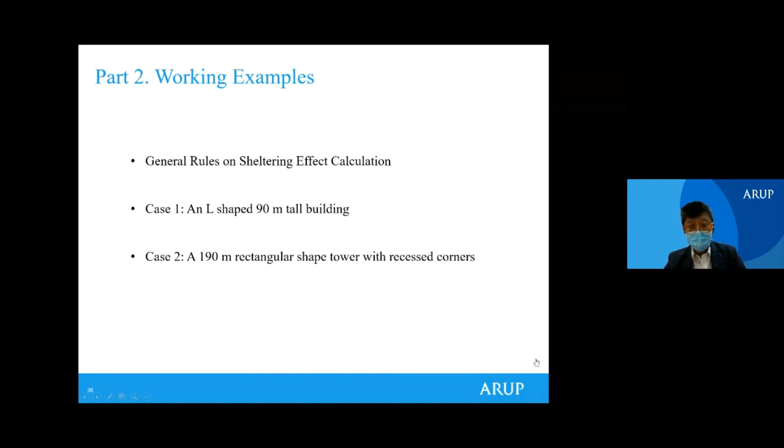Following what is described by Alexis, I'm going to show some working examples to introduce the detailed calculation procedure. Within this part, there will be 3 contents. The first one is a general briefing about the sheltering effect calculation, and the second one is an actual working example.

This working example is a 90 meter tall L-shaped building. The second work case will be a taller building, about 190 meters, and it's a rectangular shape, also with some corner modification. So we go through the 3 contents one by one.

The first one is a general rule on sheltering effect calculation. As Alexis has introduced, this is a new feature in the 2019 code. Within that, if we consider the sheltering effect, we can get some benefit. So we want to touch into more details because this is quite new - it hasn't appeared in the previous code.

So the sheltering effect is, for example, as explained in the first part, if the elevation is 150 meters, we assess the wind pressure. That is for example in the 2004 wind code. But now, if due to the sheltering effect - physically it's something like the wind profile is lifted upward - so for example if we say the displacement height is 50 meters, then previously we assessed the wind pressure at 150. Now, still for the 150 meters tall building, we only need to calculate the wind pressure at 100 meters.

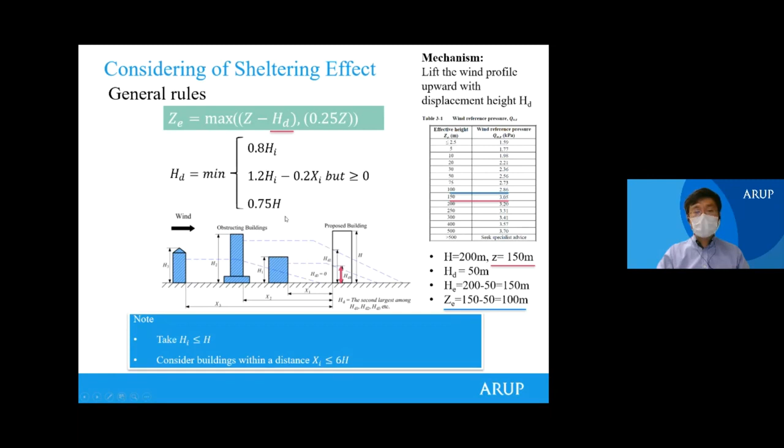So next are some general rules. Rule number one is that if we have only one obstructing building, we shouldn't take the benefit from the sheltering effect. The reason is the sheltering effect is something that we rely on other buildings to provide, to reduce the wind pressure. So we need to avoid the condition that within the design life of our target building, this obstructing building may be removed. That's why if we have only one obstructing building, we shouldn't take any benefit.

Rule number two is if we have more than one obstructing building, what we need to do is evaluate the exact sheltering benefit from each individual building. How do we do the evaluation? We need to follow the three formulas. But to make the code more user-friendly, we also provide a contour plot. This is in A2.3 in Appendix A2. This is exactly the same as the three formulas.

So based on this, we can identify the actual sheltering effect for each individual building. For example, the taller one - if we assume it provides the bigger sheltering, we shouldn't take that into account, we ignore that. And then we keep searching for the second most benefit, which will be a slightly shorter building but closer to the site, and then we can take this into account. The reason we can take this into account is that for two individual developments, the chance of simultaneous redevelopment and simultaneous removal of two buildings together - the probability is much smaller.

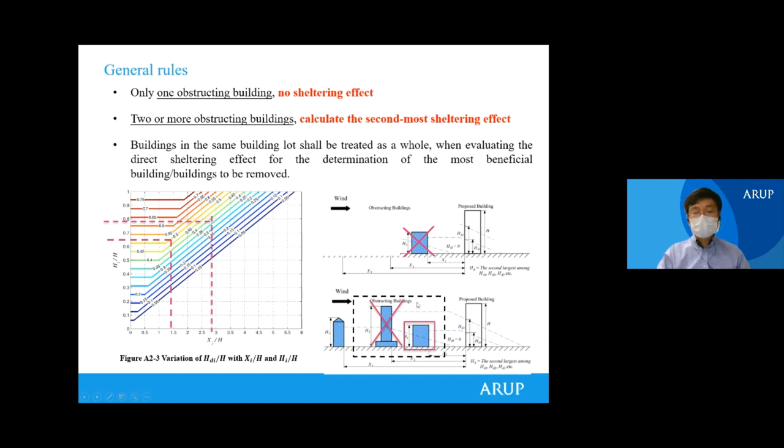Another case is, we talked about the condition in the flat ground or flat terrain. But in Hong Kong we have many locations in slope terrain, so how should we treat it. First of all, we should keep a clear idea that the topographic calculation and the topographic effect, and the sheltering effect, should be calculated separately. Then the topographic effect can be calculated independently.

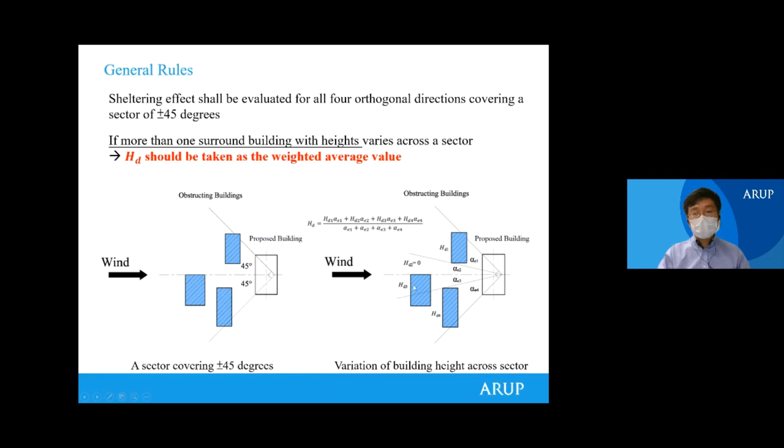All the previous discussion considers a one-dimensional problem, but in the actual site condition it's two-dimensional, it's a plane. So the code says for the sheltering effect, we need to evaluate 4 orthogonal directions, each covering about plus and minus 45 degrees, so that is a 90-degree sector. If the building height varies across this 90-degree sector, we should calculate the sheltering effect for each individual building and then do a weighted average.

According to our experience, the code also allows the user to do an equal division. For example, within the 90 degrees, we can equally divide the sector into smaller subdivisions, but the total number of subdivisions shouldn't be fewer than 4. According to our experience, if we divide this into more divisions, it will lead to a relatively easier calculation. The reason is, if we divide into small divisions, it's more easy for a building to occupy the whole sector, which will simplify the calculation because we don't need to do the weighted average.

So that's a brief introduction about the sheltering calculation principle. Now we go to the actual working example.

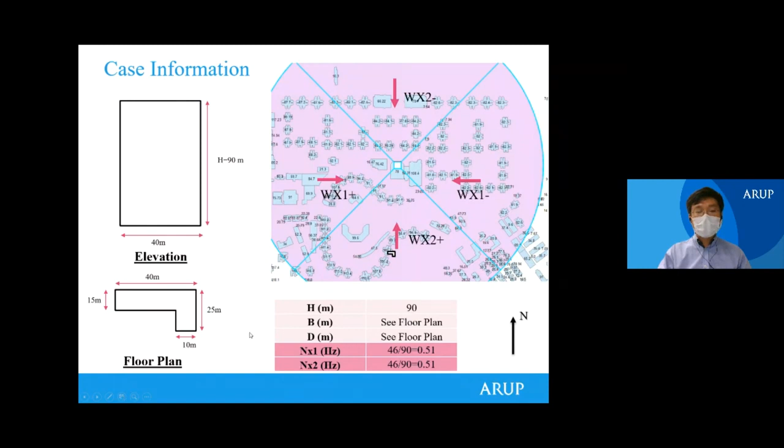The first working example is an L-shaped building. This is the map where it is located - it's in a relatively very dense urban center, and it's not very tall, the total building height is 90 meters. On plan it is an L-shaped building, the breadth is about 40 meters, and the depth on the two sides is about 15 and 25 meters. Because the building is shorter than 100 meters, the natural frequency we can use is 46/H - that is allowed by the code.

So what we want to demonstrate through this working example is, first of all, the general workflow to conduct a codified calculation. The general workflow will be, at the very beginning, as Alexis introduced, we make an initial assessment whether the standard approach applies or not. If it applies, we move forward to do the along wind calculation.

In the along wind calculation, first we need the reference design wind pressure related to directionality, sheltering effect, and the topographic factor. Then force coefficient, size, and dynamic factor. Then we can calculate the along wind force. Based on the along wind force and the geometry, the B/D ratio, we can calculate the torsional load.

Then we also need to check whether the building is crosswind significant. If not significant, what we should do, and if it is significant, what we should do. And finally, the load combination. Some bright points with this particular working example: first of all, the crosswind is not significant here, so later we will show another example where the crosswind is actually significant.

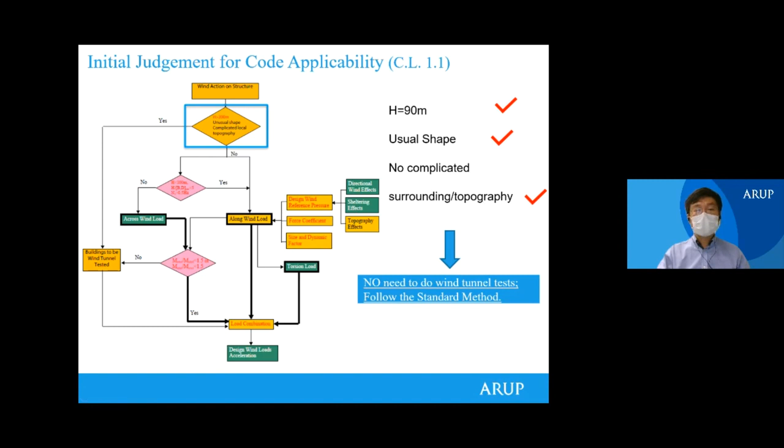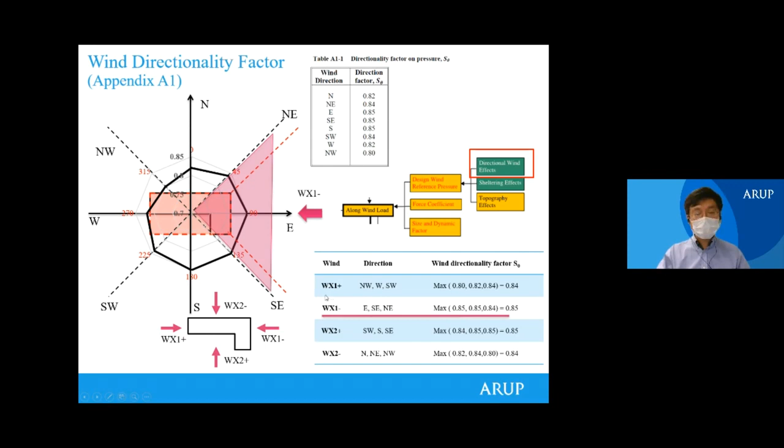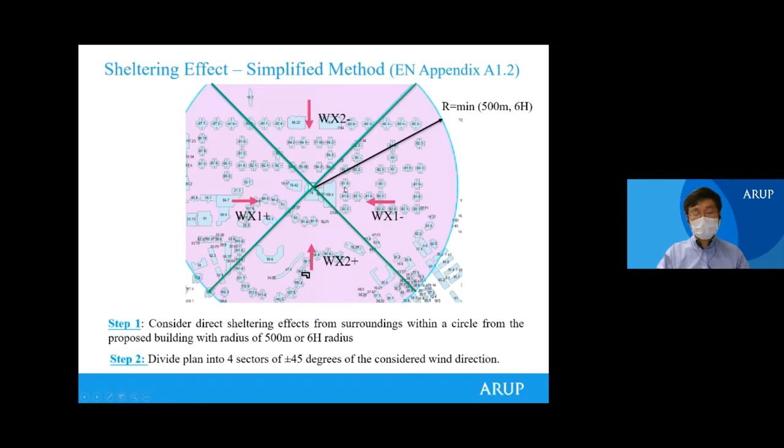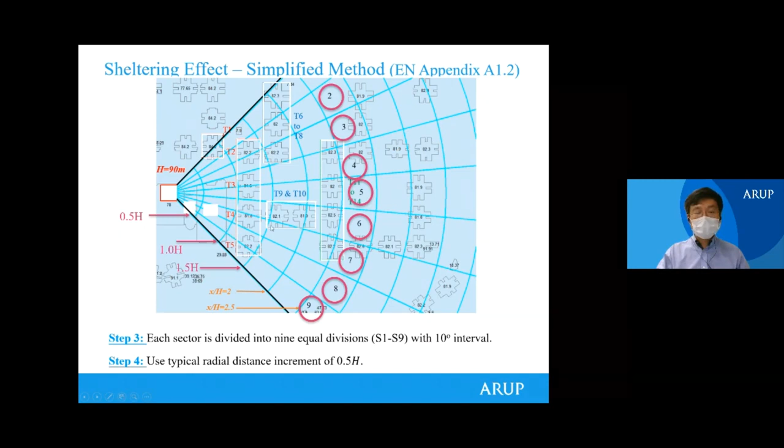And then we introduce some general principles on how we can use the simplified approach to make our calculation easier. So the first one we need to bear in mind is within 2 times of the target building height.

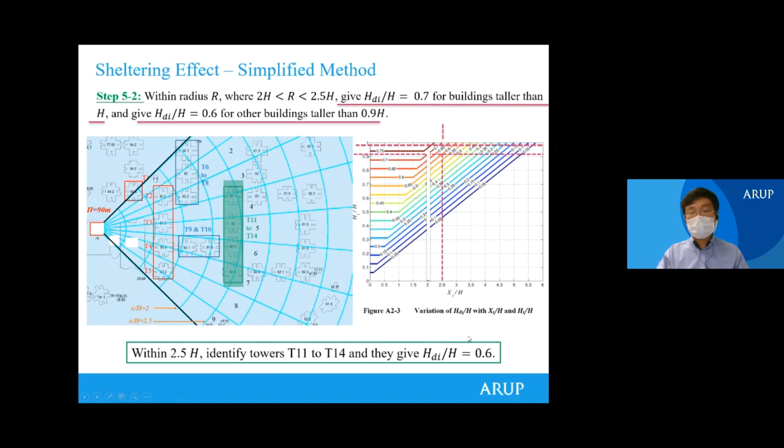So those are the buildings highlighted in green. For those green shaded buildings, we can also get a relatively big sheltering effect, that is 0.6. So then we need to go to the detailed calculation.

So according to the rule, we need to identify the first and second benefit. Actually within 2 times of the building, all those buildings can provide the full sheltering. So what we need to do is just pick up the first layer as the most sheltering building, that is from tower 1 to tower 5. Then we remove them, we ignore their contribution.

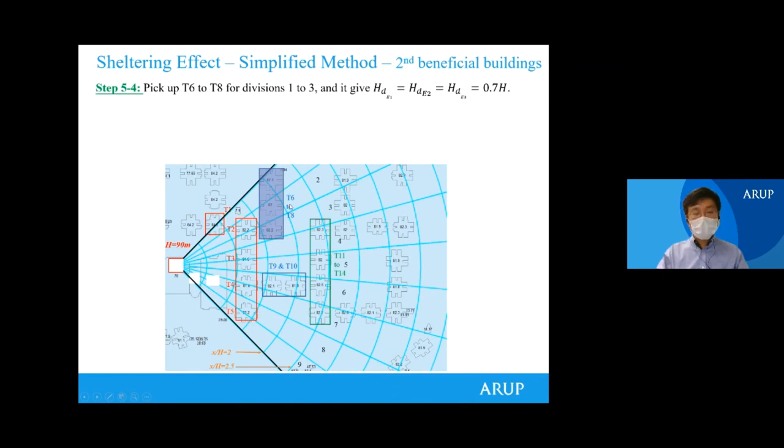So further to that, we pick up tower 6 to tower 8 to provide the sheltering for division 1 to 3. They provide the full sheltering, that is 0.7. And then for division number 6, we pick up tower 9 and tower 10. They also give the full sheltering.

Further to that, for division 4, 5, and 7, we pick up tower 11 to 14. So that gave sheltering about 0.6. And then for the remaining ones, division number 8 and 9, conservatively, we ignore their benefit, so that's 0. Then finally, we have known the sheltering benefit for all the divisions.

And then we repeat the same procedure. We can calculate the sheltering effect for all 4 directions. So then the sheltering effect calculation is completed.

So after the calculation of the sheltering effect, we can calculate, together with the directionality, the reference wind pressure. So here we also want to highlight that we have calculated the displacement height. The ratio is 0.51, and the total building height is 90, so the HD is 45.9.

So then, for the EZ which are bigger than 61 meters, for those values we can use the equivalent effective height directly, ZE equal to EZ minus HD. So those will be those values. However, we also need to bear in mind, if below this value, if we further still use EZ minus HD, that will give smaller or even negative numbers.

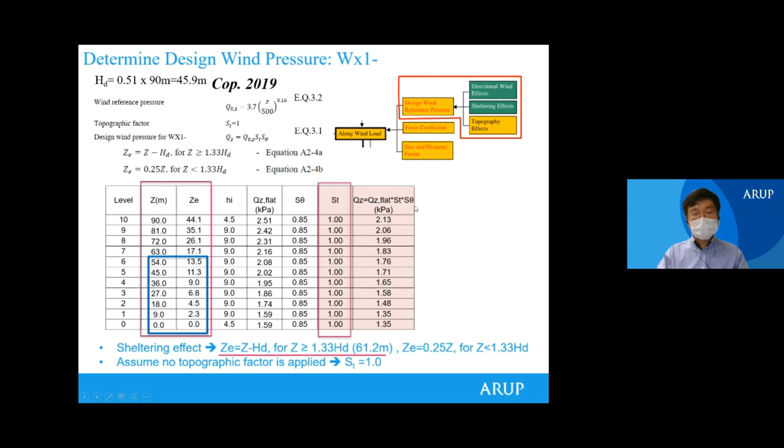So then within the code, in appendix A2, there are equations A2-4a and A2-4b. A2-4b says if Z is smaller than 1.33 times the displacement height, we need to use 0.25 Z, that is highlighted in the blue box. And then, because it is located in flat terrain, the topographic factor is 1. So totally with the QZ flat, directionality, and topographic factor all multiplied together, we can calculate the reference wind pressure.

Next, within the calculation of along wind force, we calculate the reference wind pressure. So we need to go to the force coefficient calculation. For the force coefficient calculation, I think I want to highlight another thing.

For our building, the B is 25 and D is 25. D is because we have an L shape, according to our code, figure 4.4E. For an L-shape building, the effective building depth is the average between D1 and D2, calculated as 25. So HE over D is about 1.76. Our building is 90, so if we used the original 90, it would be 3 to 4, but now it's only 1.76.

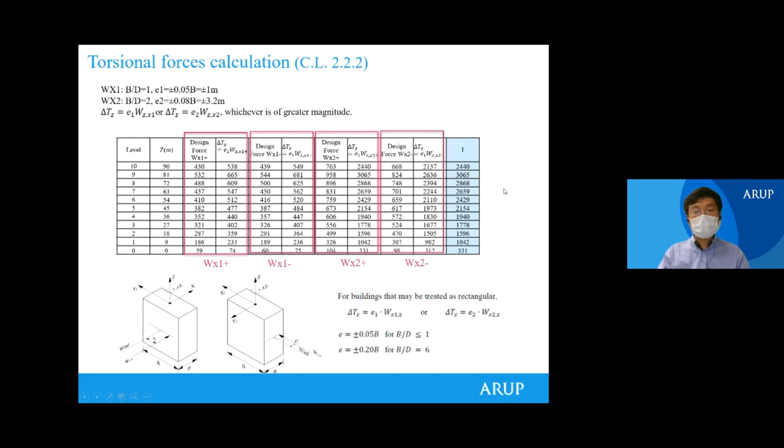Then we go to the last step of loading calculation, the load combination. Because the crosswind significance checking shows crosswind will not be significant, what we need to do is use the lateral force from both orthogonal directions, from the along-wind force, together with the torsional force to do a load combination. The load combination factor is provided in table 2.1 in the COP, so we just follow that factor.

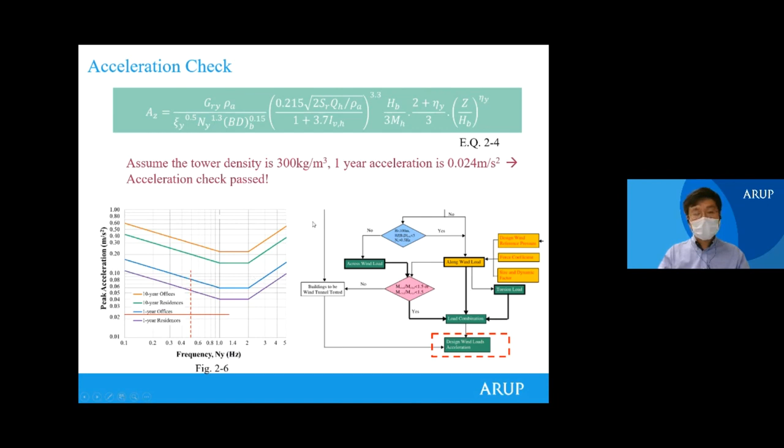So that's all for the structure wind load calculation.

The next is for cladding. This is relatively straightforward. First we need to follow equation 2.3a, that's reference wind pressure, pressure coefficient, and size factor. For reference wind pressure, we still need to follow directionality and sheltering effects, which have already been calculated, so we won't repeat. One thing to bear in mind, as Alexis introduced in part 1, a new feature for the new code is the reference height for the entire elevation is the top of the building. So we have only one reference wind pressure, that is 2.13 kilopascal.

Then we need to refer to figure 4.6a, which gives the zone key definition: where is the edge, where is the general zone, where is the corner. By looking at table B1.1, we know the net pressure coefficient for different zone keys, and following appendix C1 for the size factor formula. For edge zone, we calculate the size factor as 1.22. I also need to remind that size factor is tributary area dependent, so we assume the glass panel is 1 meter by 1 meter. For edge zone the size factor is 1.22, and for general zone it is 1.96.

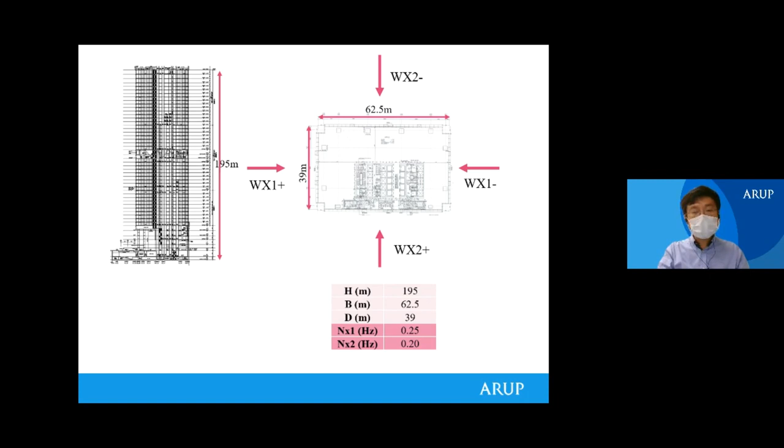The objective of this case study is to cover several unique features. The first is that we have recessed corners, and we want to use this example to demonstrate how the force coefficient can be calculated when considering the recessed corner with corner modification. The second is that because the tower is very tall, it's expected to be crosswind significant, so we'll show how to calculate the crosswind load.

Further, if a crosswind base moment is bigger than along wind, how should scaling up be conducted? And the last point is, although we pass the initial check that our building can be used for a codified approach, does that deem to be codified applicable? Is there a chance that at a later stage we suddenly realize we still need to do a wind tunnel test? We want to use this example to demonstrate we also need to conduct a further check regarding the need for wind tunnel testing.

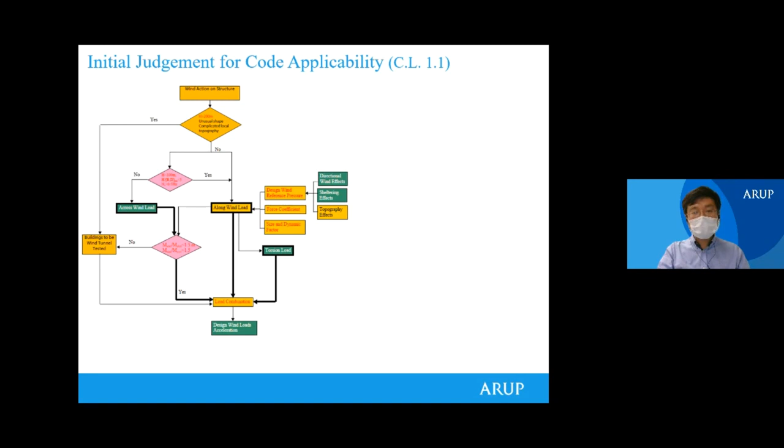Again, the first step is initial judgment for standard approach applicability. Same procedure, we won't get into details. Everything is fine, so the conclusion is the initial check shows we can use the standard approach to do the calculation.

Then determination of the design wind pressure, the procedure is also the same. First we align our building, then identify the directionality for 8 key directions, then radar plot. Then for each 90 degrees, we pick up the biggest value from the radar plot.

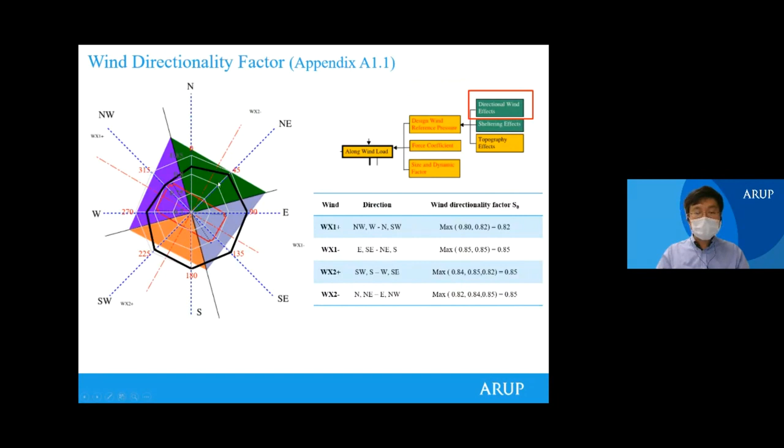The next step is calculation of the reference wind pressure. We have some assumptions here. First, we assume the building is in a very open exposure, so then there's no sheltering effect. In the last example, the ZE was significantly smaller than Z, but here we consider no sheltering effect, so ZE is equal to Z.

Second, we consider it is on flat terrain, so topography factor is equal to 1. Then very straightforward, by using the QZ flat, directionality, and the topographic factor, we can calculate the reference wind pressure.

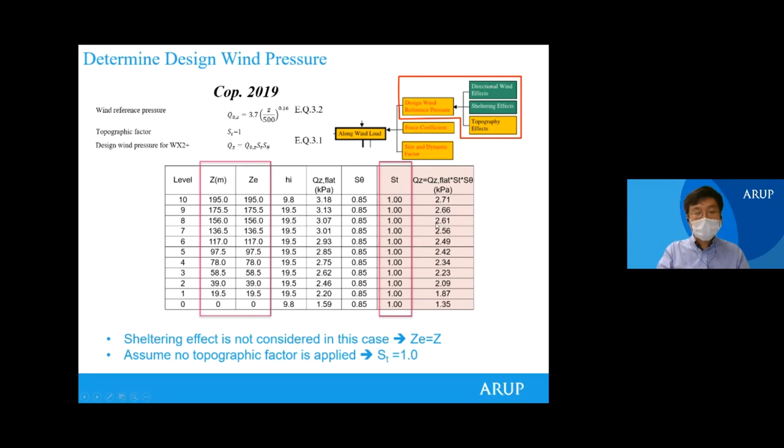As said, we want to use this case to demonstrate the corner modification. We want to remind the user that for this case, we have a recessed corner. The recessed corner dimension is about 3 meters. So we need to refer to equation 4.2 within our code, the COP. The COP here, the W is the recessed corner dimension. So by bringing in the 3 meters and bringing in the total building breadth, we can calculate the factor is 0.97, so we can have a 3% reduction on the force coefficient.

Then the final force coefficient is the product between the two, so that is 1.33. That's the final force coefficient we are going to use.

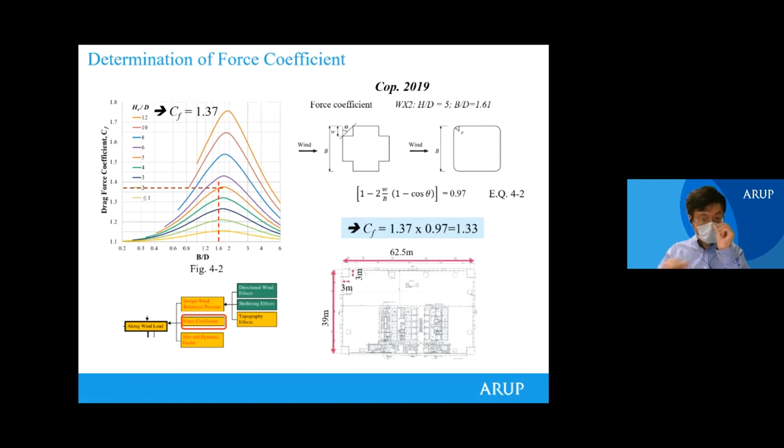After the force coefficient calculation, we need to calculate the size and dynamic factor. The first step is we need to list out all the needed parameters: the geometry information, natural frequency, and the damping ratio. Very important, as introduced in the first part, the damping ratio in the 2004 wind code is constant, so normally it's recommended as 2% for RC and 1.5% for steel.

For our case, actually in 2019, it depends on the slenderness ratio. So later we can see that for 2 different directions, we use table C2-1 to calculate the damping ratio.

Then the other formula will be the same as introduced in the first working example. We calculate the size factor by using building breadth, and then we calculate the size and dynamic factor at the top of the building. Then by using this formula, we calculate the distributed size and dynamic factor along the building elevation.

We can see the trend is that at the top of the building, the size and dynamic factor is the biggest, and at the bottom it gradually reduces, being the smallest at the bottom.

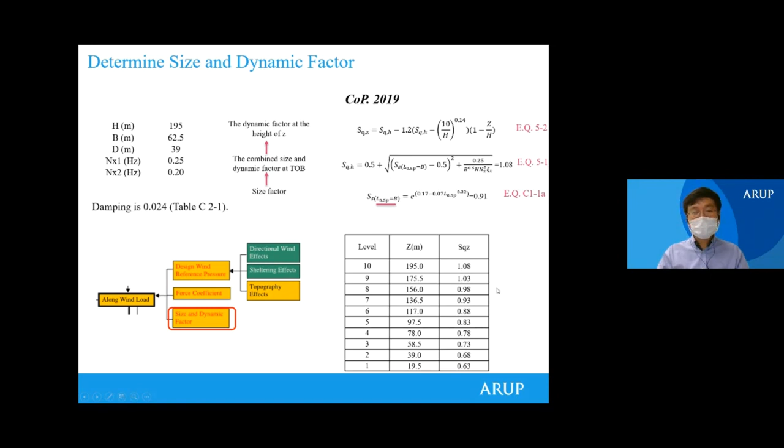And then we calculate the distributed wind force at different levels, and we can calculate the along wind overturning moment at the bottom. So for this direction, minus WX2, that will be 3,569 meganewton.

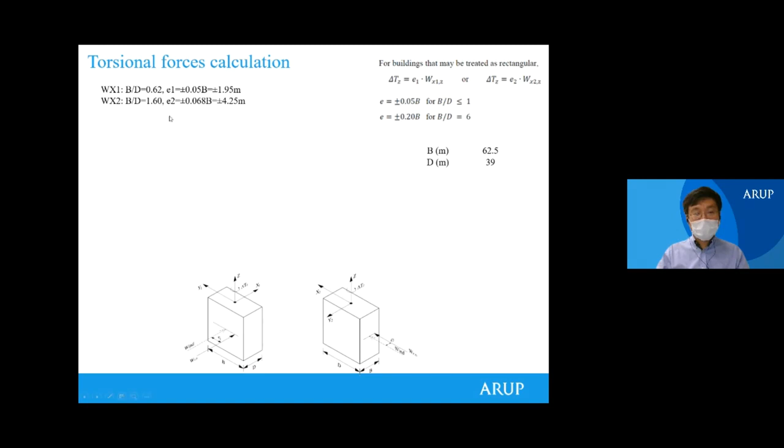The next is the torsional force calculation. The torsional force calculation will be the same as what we introduced in the previous working example. So we know the B over D ratio, we identify the eccentricity in the 2 directions, and then we calculate the torsional force in the 2 orthogonal directions. The final torsional load will be picked up as the biggest one between the two.

Next is the crosswind calculation. This is the key point, the reason why we want to introduce this working example.

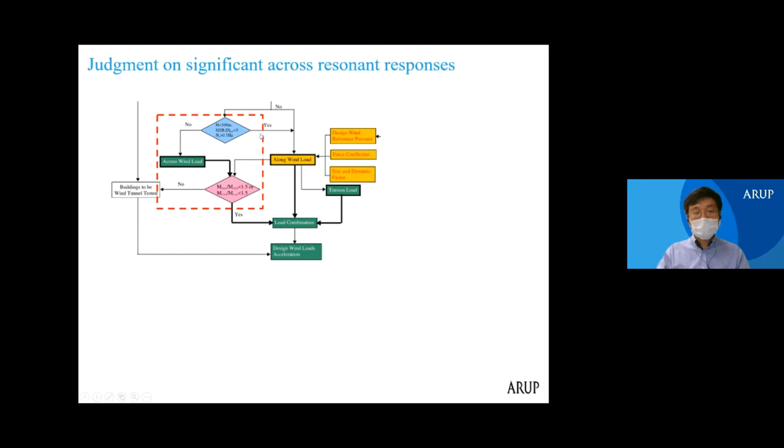Still, within this diamond box, we need to make a judgment whether the crosswind is significant or not. So list all the criteria. The first one is whether the building is taller than 100. Our building is 195, so very obviously we cannot fulfill this requirement. That means the crosswind response can be significant in this case, so we cannot get rid of the crosswind base moment calculation.

What we need to do next is use the code-provided crosswind base moment formula, within equation 2.2. Because crosswind is a purely dynamic effect, it relates to several parameters, including building geometry, the reference wind pressure on top of the building, turbulence intensity and peak factor, and the mean velocity at the top of the building. As it's a purely resonant effect, it's highly sensitive to the natural frequency and the damping ratio. Bring in all those parameters into equation 2.2.

Using the natural frequency, we can calculate the peak factor, that is 3.5. One thing to highlight: here the natural frequency is the vibration direction, or the loading direction, not the approaching wind direction - it's the actual loading direction. That's why we call it NY. So if we talk about the load as crosswind, the natural frequency should also be in the crosswind direction, that's NY, to calculate the peak factor.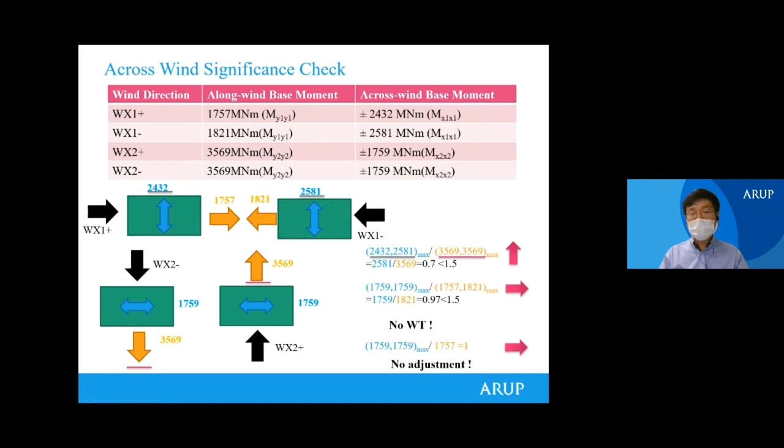For this scenario, we say we don't need to do any further action because the along wind base moment is equal to or bigger than the crosswind base moment. So we can use the along wind in the two orthogonal directions to do the load count directly. So that's the first scenario.

For the second scenario, we change the parameter a little bit. Originally for the x1 direction, we assumed the natural frequency was 0.25 Hertz. This time we reduce the natural frequency in the x1 direction to 0.21, then recalculate all the along wind and crosswind.

Especially the crosswind, it is very sensitive in this direction to the natural frequency. As highlighted in red, because we reduce the natural frequency, it is increased from the previous 1759 into 2175. So that is increased.

So let's do the comparison again. For the vertical direction, there is no change because we don't make any further adjustment. For the horizontal direction, because we have increased the crosswind base moment, this time the crosswind is bigger than the along wind. The ratio is 1.16, but still it is smaller than 1.5, so that means it's okay, we don't need to do the wind tunnel test.

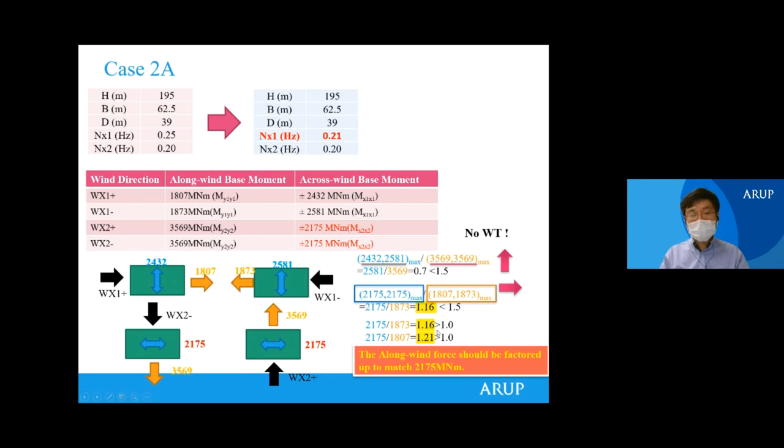The third scenario is we further reduce the natural frequency in the x1 direction, reducing it to 0.15. In this case, the crosswind base moment is increased substantially, to 3272. So again, let's check for the horizontal direction.

Now, if we pick up the biggest value between the crosswind and along wind, the ratio becomes 1.6, exceeding 1.5. So according to the code, if the crosswind base moment is larger by more than 50% than the along wind base moment, the codified approach doesn't apply anymore, and a wind tunnel test approach becomes compulsory. So we need to do the wind tunnel test. This means, through this working example, even if we pass the initial checking, it doesn't imply there's 100% no chance of needing a wind tunnel test.

Still, at a later stage, after we have calculated both the along wind base moment and the crosswind base moment, we need to do a further checking. This is also a very key characteristic we want to demonstrate through this working example.

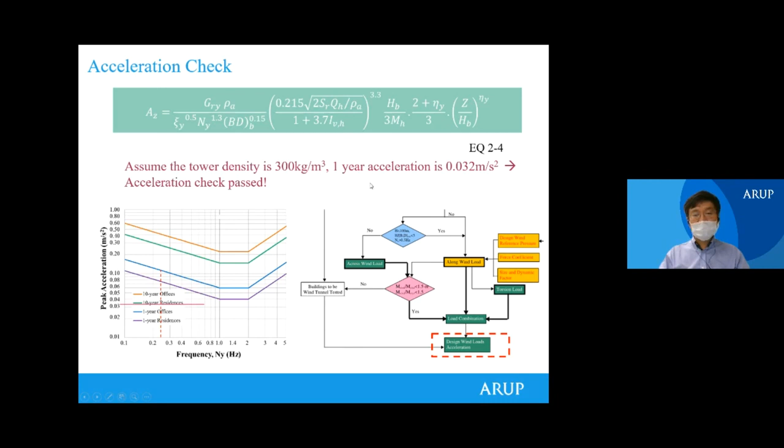And finally, it's the human comfort check. Similar as before, we bring in all the parameters. For the 1 year acceleration, we are at about 0.25 Hertz, so the threshold of the criteria is about 6 or 7 milli-G, but our calculated acceleration is only about 3 to 3.5 milli-G. So again, we pass the human comfort checking. There's no problem for the human comfort for this actual example.

And then it's the cladding pressure. This time we assume a panel size of 2.5 meters by 2.5 meters, so the half-perimeter length is 5 meters. The procedure will be exactly the same as what we introduced before.

We follow figure 4.5a to identify the zone key, then for different zones, based on the panel size, we can calculate the size factor. Also for different zones, by referring to table B1.1, we can get the net pressure coefficient. Finally, the reference wind pressure is at the top of the building, that's QH. Multiplying all those together, we can calculate the positive wind pressure and the negative wind pressure. That will be the calculation of the cladding wind pressure.

This time, because there is no displacement height and no sheltering effect, the cladding pressure is the same everywhere through the elevation, but the corner and general zones are different.

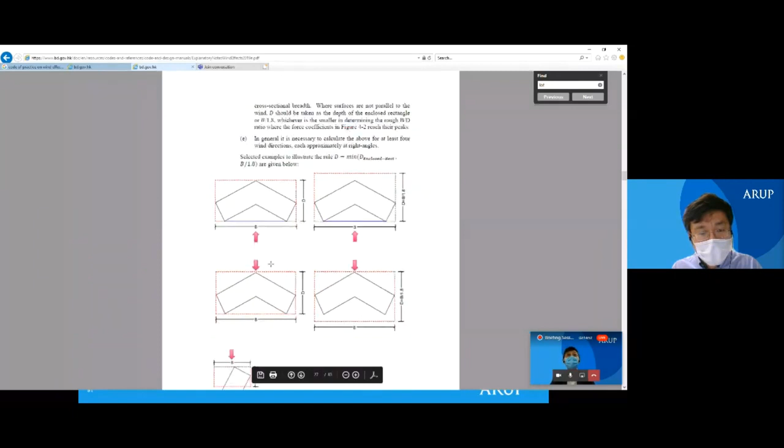Following what Alexis just introduced, I want to draw attention to the fact that when drafting the 2019 code, regarding the coverage of irregular building forms, we have moved one step forward compared with the 2004 wind code. You can see this from the presentation in Alexis's part one - for example, the X shape, L shape, Y shape, and also C shape. All those irregular building forms had not been well defined before, but through the code drafting process, the industry also contributed lots of valuable suggestions.

One comment was that even though we now have more comprehensive coverage of irregular building forms, Hong Kong is quite a unique metropolitan area with a big variety of building forms. So to avoid a large portion of buildings without force coefficient reference needing wind tunnel testing, can we provide some supplementary guidance? To answer this request, in the Explanatory Notes, I'm showing section 4.2.4.

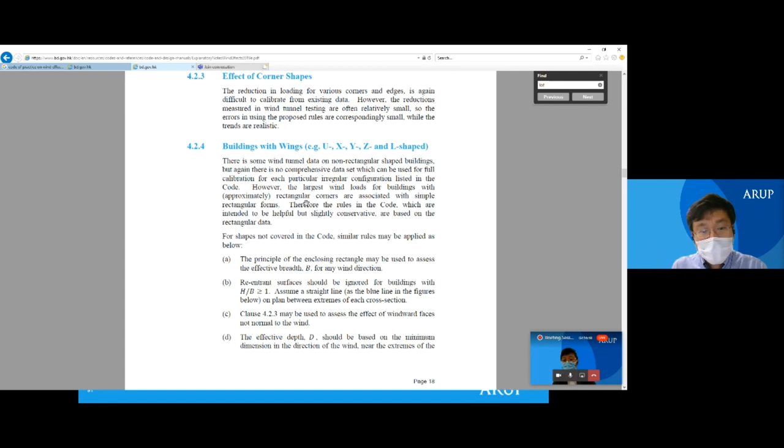This is the Explanatory Notes section 4.2.4. I think after the briefing session, you can look at this in more detail. On page 18, it says sometimes if buildings are not well covered within the COP, the following rules can be used. Generally speaking, for a very irregular or highly irregular shape, we draw an equivalent rectangle.

For this shape we ignore the void - you can see the blue part. This is the field first, and then we consider the biggest projecting breadth - that's considered one direction. So that's the biggest projecting breadth, and if there's any shape not perpendicular to the wind approaching direction, we can take into account the corner modification. That's the second point - clause 4.2.3 may be used to assess the corner effect.

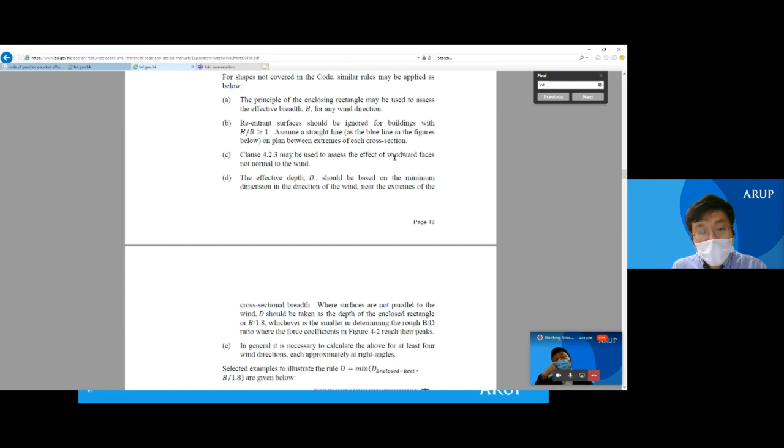And the item B is the re-entrant surface should be ignored. So this part should be ignored.

So further to that, we have identified where it is, the direction for the projecting breadth. So for the depth, we also need to calculate the D. The D should be taken as the smaller one, the minimum between the actual depth - that's the two furthest distance in the approaching wind direction - and the B over 1.8, whichever is smaller. So we have two D, and the smaller one should be taken.

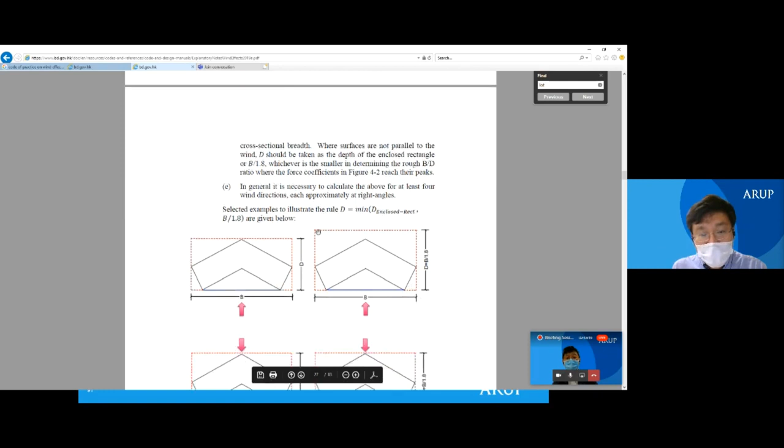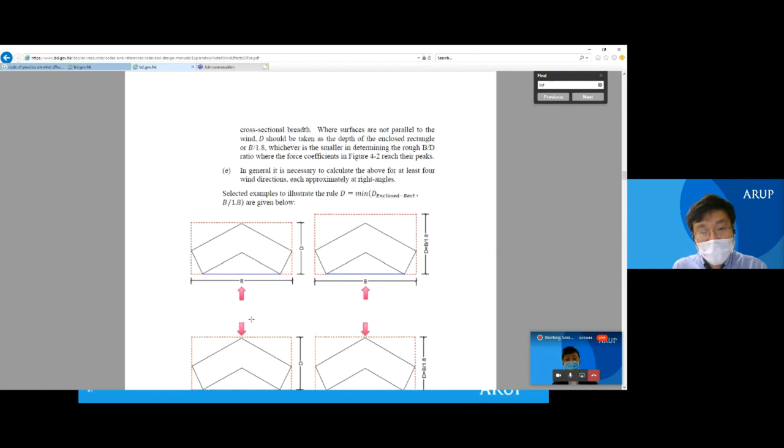So this is finally how the equivalent rectangle is drawn. For example, in this direction, the actual depth is smaller than B over 1.8. But for this direction, the actual depth is bigger than B over 1.8, so B over 1.8 is taken. This is how for irregular shape conditions the equivalent rectangle should be drawn.

Otherwise, if we have more time after the briefing session, you have a more detailed look for this section in the explanatory notes, Phil.

Yes, thank you. So how about the question on the size factor? Size factor, give me 1 minute.

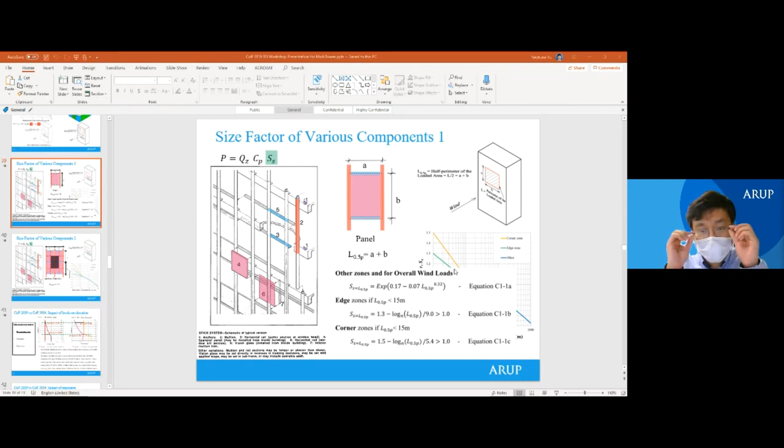I think I'll use a specific example to answer the question. So the question is how the size factor should be considered when doing the cladding design.

I think here we're talking about a very real example. For example, if you can look at my PPT slides, we talk about an actual glass wall. What is highlighted here, the pink one, we can see it's a glass panel supported by the mullions. So if we look at this glass panel, for the glass design, the loading area is the pink one. Then for the half perimeter length, it will be A plus B - that's the half perimeter length.

So how to do this glass panel design? We should consider the size factor. And then if we talk about the anchor here, we know that those points will share the wind loading from the full panel. So actually for this anchor or fixing, it will be this tributary area. So the half perimeter length will be this tributary area. So this is another case.

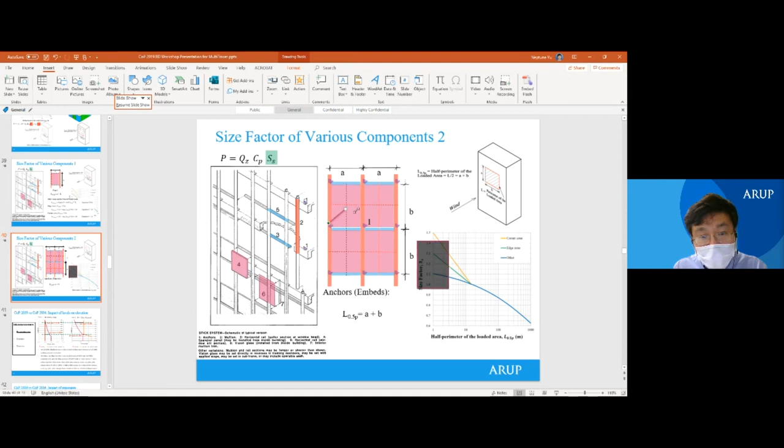And the third one is, instead of this, we talk about a transom. If you look at it, for a transom it will be something like this - this will be the tributary area for the transom design. So the half perimeter length will be this one. For the mullion it will be the same, trapezoidal like this. So then the half perimeter length will be half of the trapezoidal perimeter.

So this is to answer the question - by using the new wind code, how the size factor can be calculated subject to the different loading area.

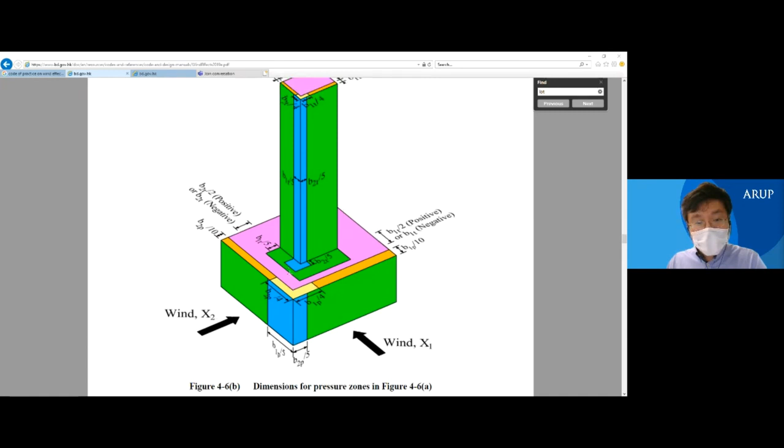I think the question is asking how to calculate the suction or negative pressure on the roof. I think this is not only for the portal frame, but also for all low-rise buildings for the roof calculation. We can refer to figure 4.6b, which shows the zone definition on the roof. But for this case, we just don't have the upper tower, so it will be something like this zone definition of the roof. After we identify the zone, we can use this zone dimension.

So the extent, the different extent, we need to go back to the table. For portal frames, it applies whether it is smaller than 30 degrees or bigger than 60 degrees, and whether any interpolation between the two is needed.

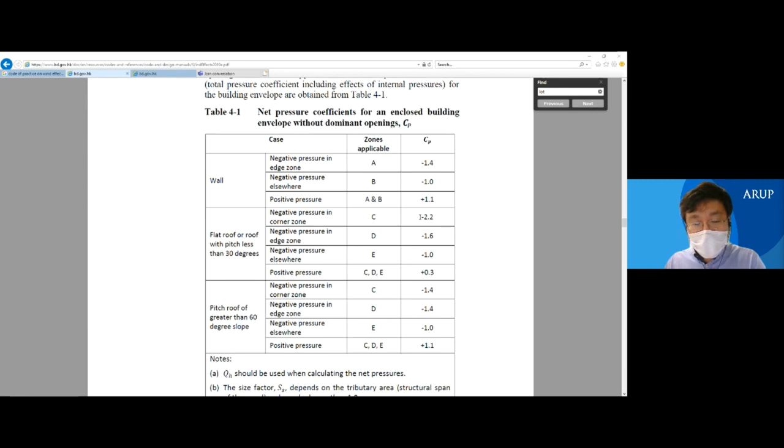If it is less than 30 degrees, what we need to do is just follow the zone key to identify the suction zones. But what I want to remind is if it's for cladding design, then it will be applicable everywhere, so it's most onerous. But if it's for structure design, maybe we don't need to be that onerous, because if wind blows from this direction only here, this is the corner. For the remaining one, for example this one, it will not be that onerous.

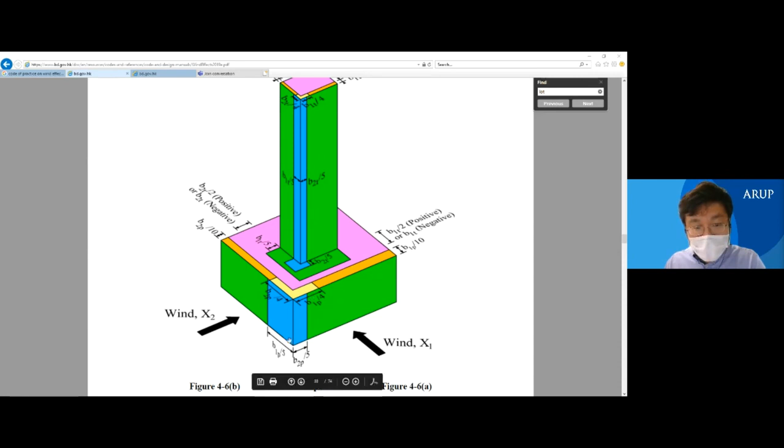That's why at the very beginning I recommend we look at this first. For a particular wind direction, this is the highest suction, this is the second most onerous section, and this is the less onerous location. For structure design it's better to refer to this one, which will give us not the most conservative result.

Okay, the next question is about a crosswind calculation. How can we obtain the mass of the building above 2H/3? Do you have any idea about this one?

This talks about when we do the acceleration calculation, we need to provide the mass of the top 1/3 of the building, because aerodynamically the top 1/3 is the most important part. So how to do that?

If we have a finite element model, for example ETABS or SAP2000, that will need a mass source definition. Within our code we also say that in wind design, the mass source definition should be from the loading: 100% from the dead load and 25% from the live load. That's the mass source definition.